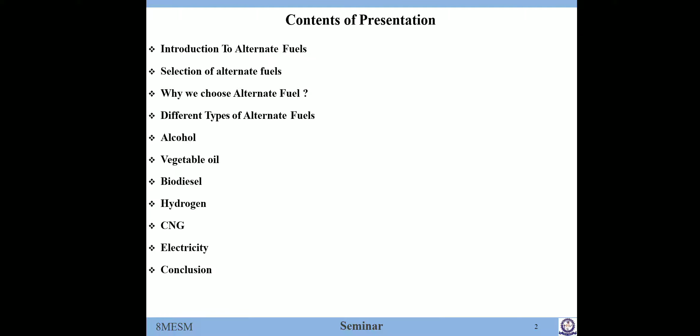Introduction: conventional fuel. Conventional fuels are those fuels which occur naturally. They are in limited quantity, so they are on the edge of being extinct. Examples for conventional fuel are coal, petroleum, etc.

Alternate fuels are also known as non-conventional fuel. These are materials or substances that can be used as fuel other than the conventional one. They are highly oxidized, sulfur-free, and environmentally friendly. Examples: alcohol, vegetable oil, biodiesel, natural gas, etc.

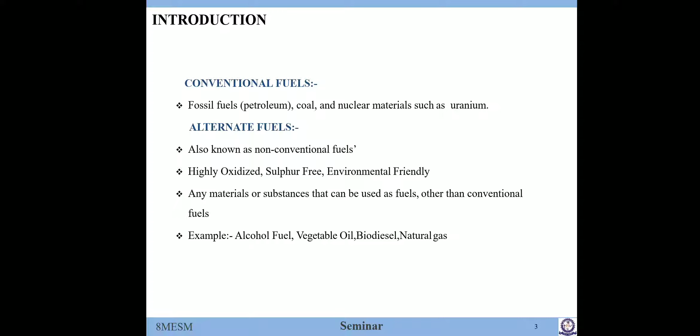The increase in energy consumption, particularly in the past several decades, has raised fear of exhausting vital natural resources. Rapid industrialization and massive growth in population has increased the dependence on natural fuels. Currently, approximately 90% of our energy requirements are met by fossil fuels.

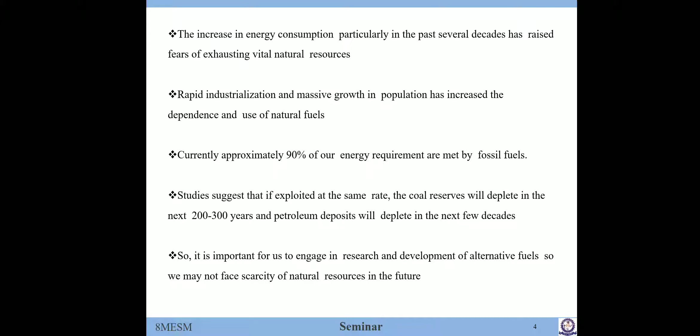Studies also suggest that if we exploit at the same rate, the coal reserves will be depleted in the next 200 to 300 years. So it is important to engage in research and development of alternate fuels.

Selection of alternate fuels. Alternate fuels are selected on the principle of 3 E's - that is, they should be efficient, they should be economical, as well they should be eco-friendly.

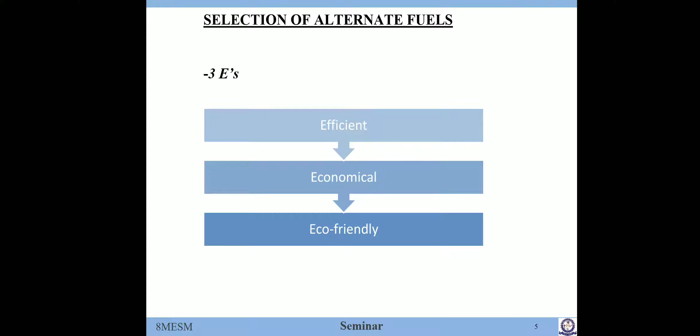Why we choose alternate fuel? So these are the few reasons for choosing alternate fuel other than the conventional one. First, conventional fuels are going to run out.

Second, to reduce pollution. The use of alternate fuel considerably decreases harmful exhaust emissions such as carbon dioxide, carbon monoxide, etc., to protect against global warming.

According to commonly accepted scientific theory, burning fossil fuel was causing temperatures to rise in the Earth's atmosphere. Though global warming continues to be just a theory, a lot of people across the globe are of the belief that discovering sources of cleaner burning fuel is an essential step towards enhancing the quality of our environment.

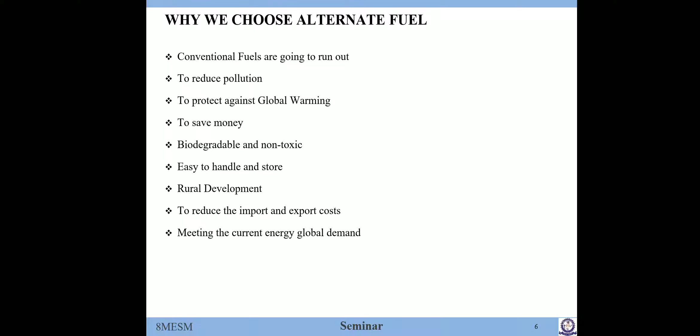To save money, alternate fuel can be less expensive to use, not just in terms of the fuel itself but also in terms of long service life. They are biodegradable and non-toxic, that is, they can degrade easily and are less harmful. Other benefits include easy handling and storage, rural development, reducing the import and export cost, and meeting the current global energy demand.

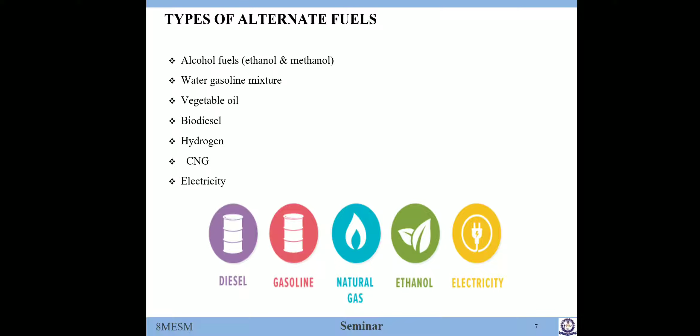The different types of alternate fuel available are alcohol fuels, water gasoline mixture, vegetable oil, biodiesel, hydrogen, CNG, and electricity.

First, we will discuss alcohol. In the alcohol portion, we will first discuss ethanol.

Ethanol is a renewable, domestically produced alcohol fuel made from plant materials such as corn, sugarcane, or grasses. Using ethanol can reduce oil dependence and greenhouse emissions.

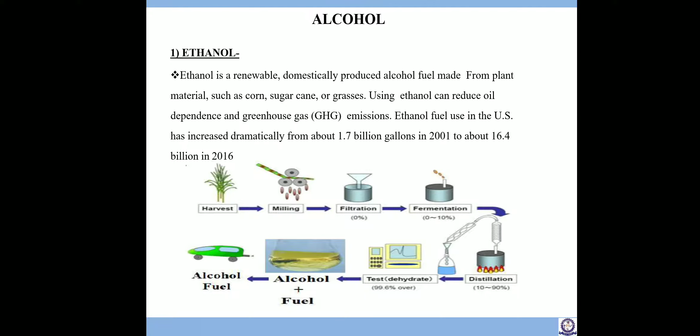Alcohol-based alternative fuels are produced by fermenting and distilling starch crops or cellulose. They are most commonly used to increase octane and improve the emission quality of gasoline.

Alcohol is an excellent clean burning fuel and has a higher octane rating, but high ethanol blends present a problem in achieving enough vapor pressure for the fuel to evaporate and spark ignition during cold weather.

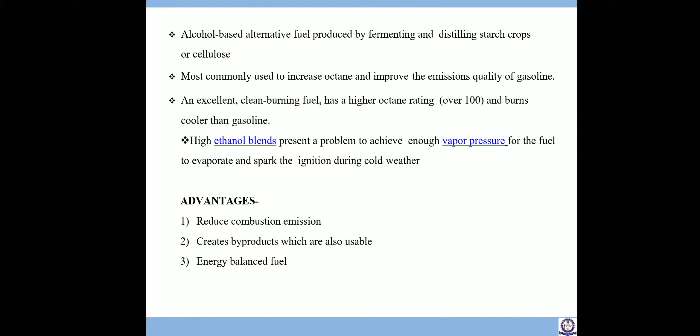Advantages: reduced combustion emissions, creates byproducts which are also usable, and has an energy balance benefit.

Some disadvantages: it is a corrosive fuel, costly, and depends on the quality of the growing season, which means if there is a drought, production will be less, hence there will be no ethanol, so we could not power any vehicle on ethanol fuel.

The table shows annual fuel ethanol production by country from 2007 to 2013, which suggests that the US has increased tremendously in ethanol production.

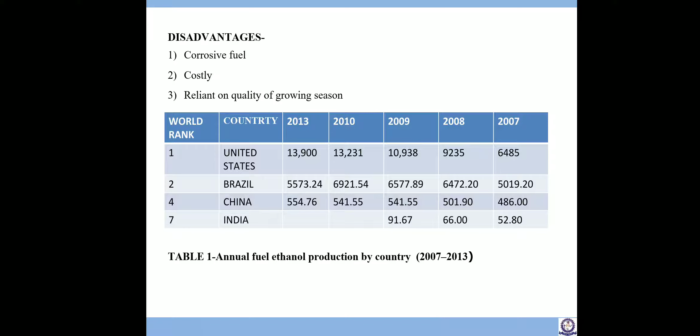Methanol. Of all the fuels being considered as an alternate to gasoline, methanol is the most promising. Methanol is also known as wood alcohol, and it could be used as alternate fuel in flexible fuel vehicles. The benefits include lower emissions, higher performance, and lower risk of flammability than gasoline.

Methanol can be easily made into hydrogen for hydrogen fuel cell vehicles in the future. However, methanol is extremely corrosive, requiring special material for delivery and storage.

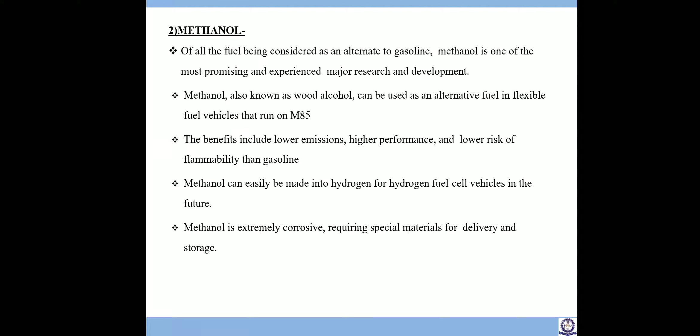Vegetable oil. Rudolf Diesel designed a diesel engine in 1894 to run on peanut oil. An extract from Diesel's speech in 1912 says that the use of vegetable oil for engine fuel may seem insignificant today, but such oils may become, in the course of time, as important as petroleum and coal tar products of the present time.

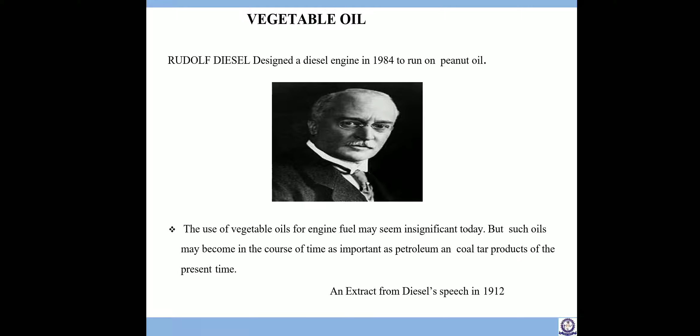Most diesel car engines are suitable for the use of straight vegetable oil, also commonly called pure plant oil, with certain modification. The viscosity and surface tension of SVO must be reduced by preheating it, typically using waste heat from the engine or electricity. Otherwise, poor atomization, incomplete combustion, and carbonization may result.

One common solution is to add a heat exchanger and an additional fuel tank for petrodiesel or biodiesel blend, and to switch between this additional tank and the main tank of straight vegetable oil. The engine is started on diesel, switched over to vegetable oil once warmed up, and switched back to diesel shortly before being switched off, to ensure no vegetable oil remains in the engine or fuel line when it is started cold again.

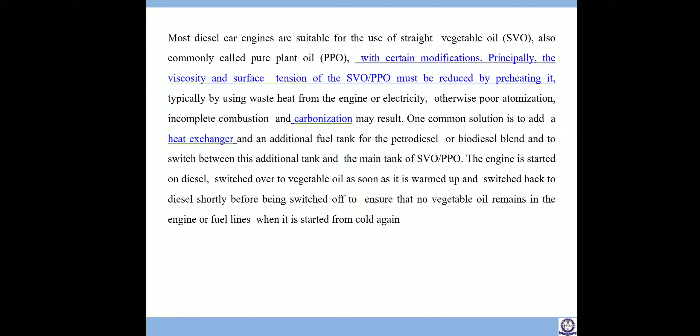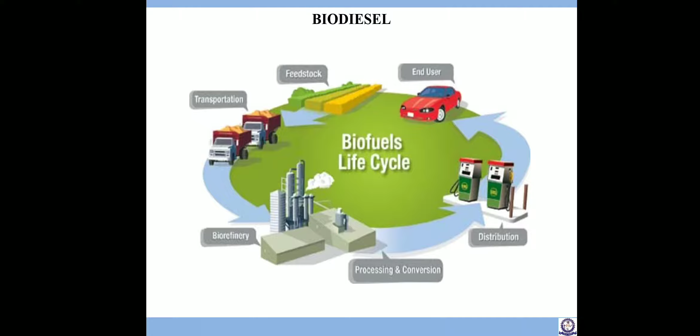Biodiesel. The cycle shows a feed of biodiesel from plants, because biodiesel is a fuel derived from plants or animals. It is then transported to biorefineries, which process and convert it to a petrol-like product, which is distributed to petrol pumps and finally to the end user.

Biodiesel is a domestically produced renewable fuel that can be manufactured from vegetable oil, animal fat, or recycled restaurant greases. Biodiesel is safe, biodegradable, and reduces air pollutants such as particulates, carbon monoxide, hydrocarbons, and air toxics.

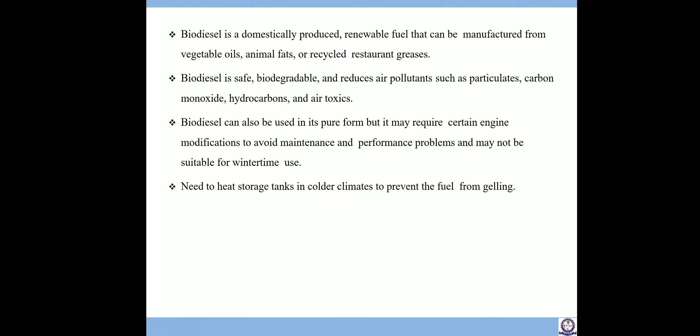Biodiesel can also be used in its pure form, but it may require certain engine modification to avoid maintenance and performance problems. It needs to be stored in a heated tank in colder climates to prevent the fuel from gelling.

Importance of biodiesel: it is environment friendly, a clean burning fuel as well as a renewable fuel. It doesn't require any engine modification. It increases engine life. It is biodegradable and non-toxic, easy to handle and store, completes the CO2 cycle, and is sulfur free.

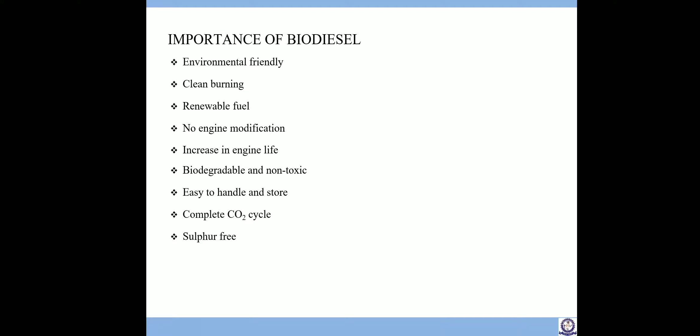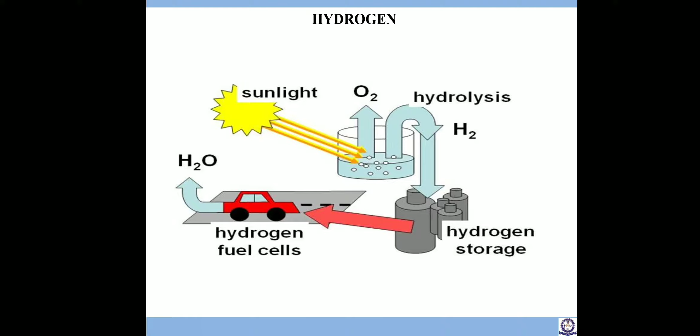Hydrogen is an environmentally friendly alternative to fossil fuel, and it can be used to power just about any machine needing energy. Hydrogen is abundant in our environment. It is stored in water, hydrocarbons, and other organic matter.

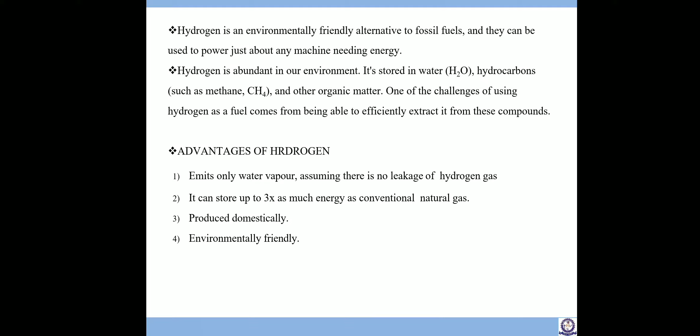Advantages of hydrogen: it emits only water vapor, assuming there is no leakage of hydrogen gas. It can store up to three times as much energy as conventional natural gas, is produced domestically, and is environment friendly.

Disadvantages: it still costs a considerable amount of money to run a hydrogen vehicle, it is highly flammable, and difficult to store.

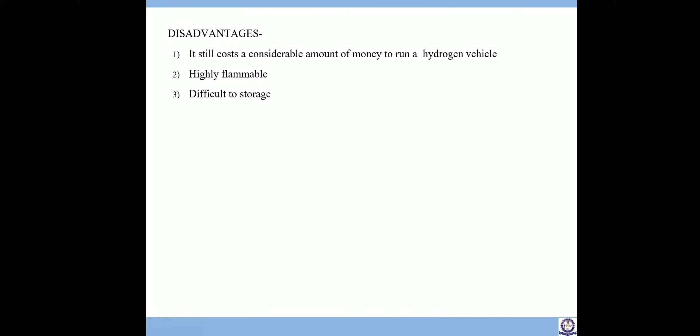Next is compressed natural gas. It is much safer than other fuels in the event of a spill because natural gas is lighter than air and disperses quickly when released.

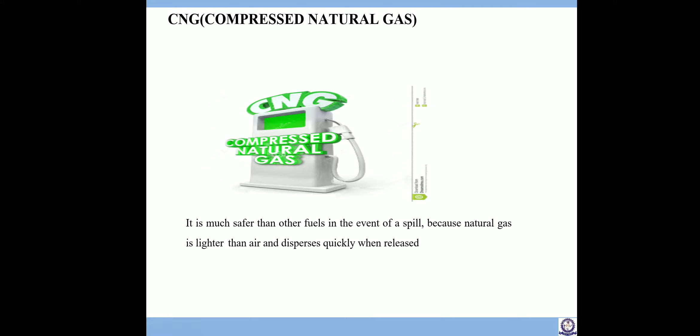Advantages of using CNG: it can be used efficiently and safely stored, it is more environmentally friendly due to its low emission after burning, and most of the natural reserves of natural gas field are underutilized. There is improved lubrication because the cylinders are not washed by excess petrol.

Disadvantages: it does create greenhouse gas emissions. It is volatile and can be dangerous if not handled or transported properly. They are not as roomy as gasoline cars, and there is a high overall cost of a natural gas vehicle compared to a gasoline powered vehicle.

Electricity. One proposed form of alternative fuel that has been widely talked about is electric power. This is a domestically produced renewable source. Electricity could be used in the form of an onboard rechargeable battery to power an electric motor.

Some advantages: it gives quiet running of a vehicle, instant torque from the electric motor, there are no emissions from the car, and the cost per mile is a fraction of that for a gasoline powered car. There is widespread electric infrastructure, and electricity can be partially derived from renewable sources.

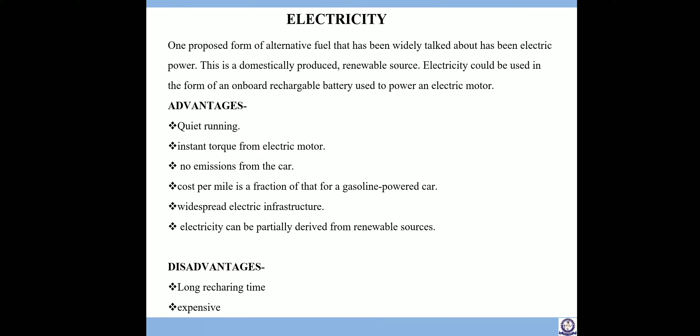Disadvantage: long recharging time and it is expensive.

So the conclusions from this presentation can be drawn as follows. The alternative fuel sources are environment friendly as compared to fossil fuel. Second, by using alternate sources we can reduce air pollution, which is the cause of many deadly diseases.

Using alternative fuel helps to reduce global warming. Throughout the year, these sources are available without affecting the environment. And finally, it helps us to conserve natural resources.